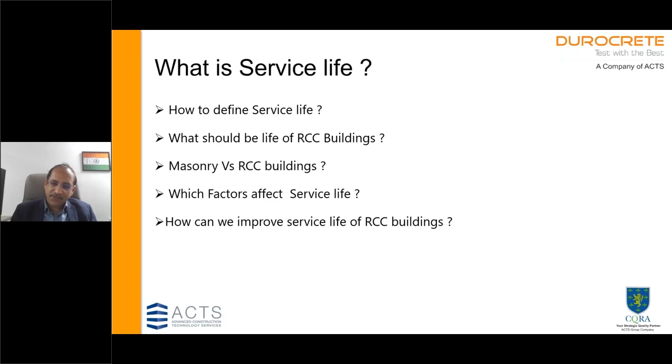So let us look at some of the most well-built structures. Now, if you go to Austria, there's Mozart's birthplace. This is a building that was constructed in 1750, and it looks so new even today. Then, if you look at Holland, it's a country where they're short of land and they have acquired space from the sea by constructing dikes. These dikes are structures designed for a life of 300 years. You can see how well they have been constructed, with due consideration to conditions of exposure.

Coming back to India, we have this BAPS Swaminarayan temple, which we were party to constructing in Pune. This building was constructed with a design life of 1,000 years, and it has got no reinforcement in the entire structure.

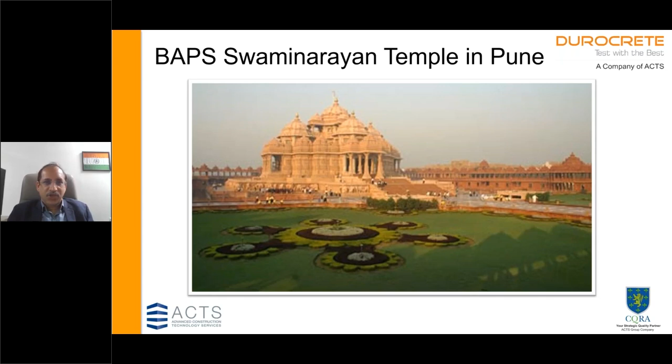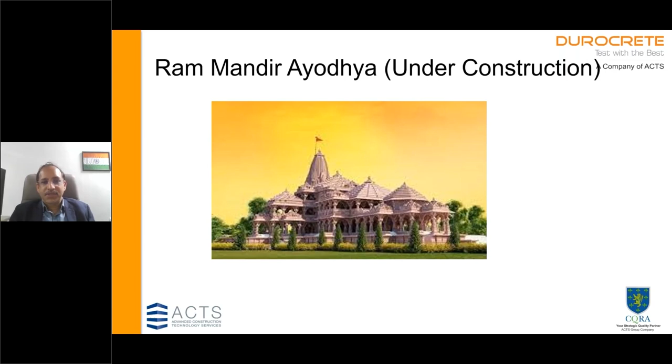We have another famous example, which is Ram Mandir in Ayodhya, which is also being built for a service life of 1,000 years, and that also has been constructed without any use of steel. The biggest challenge that they had was to make it earthquake resistant, and they have managed that.

So this question comes to us: why do modern RCC buildings have a shorter life? Many buildings constructed even 70, 80 years back, if you go to Mumbai on sea face, you will find them in good condition. Whereas new buildings constructed much later have shown deterioration. So let us look at some of the possible answers for that.

One is the use of extremely high water cement ratios, as today workability requirements are high. We are doing tall buildings. There is heavy congestion of reinforcement. We use very high workability concrete, pumpable concrete.

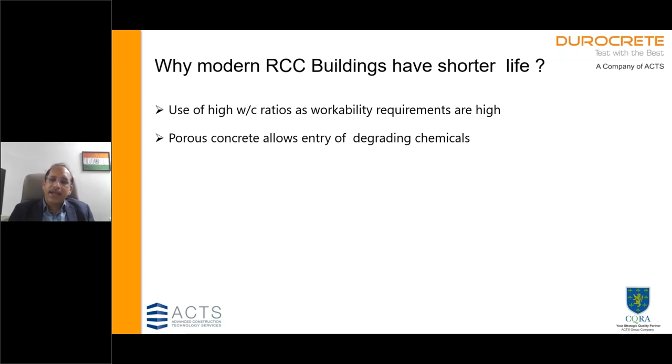And the problem is that buildings are constructed very quickly, so not enough care is given to curing. So the problem is porous concrete that allows entry of degrading chemicals inside the structure.

Then there's also a problem of mass scale RMC proliferation. The demand has increased multifold, so there is very little control on the raw materials used in construction today.

Many times the concrete is not designed for proper conditions of exposure, something we are going to study in detail in this session. And then, last but not least, quality of steel also matters. We all do physical testing, but we rarely do chemical testing of steel.

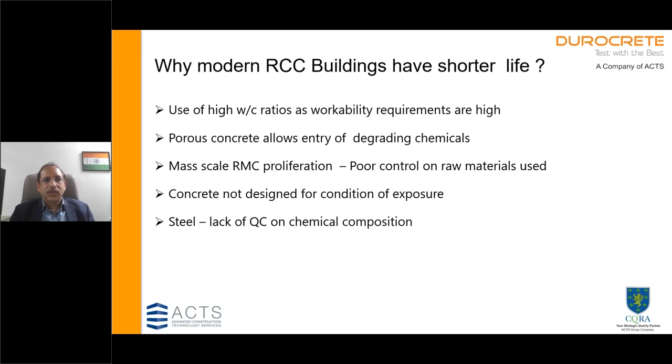So let us look at what is the failure of a structure. The failure of a structure is non-performance for which it is designed, or it poses risk to occupants, or it needs repairs to allow its intended use.

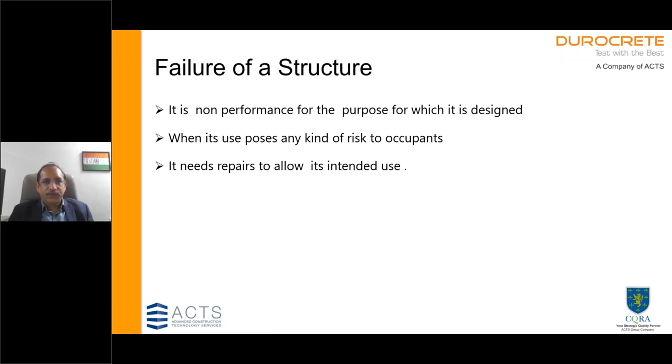So failure is not a collapse. Collapse is much more than that, it is a catastrophe. So we'll look at some examples of collapses also.

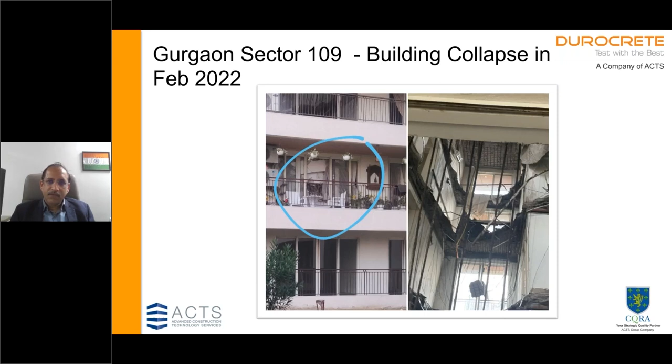This was a recent building in Gurgaon that collapsed, and there were a couple of deaths. This particular flat was unoccupied and came up for repairs. It was being renovated, and suddenly a portion of the slab collapsed, and there were some people dead in that. So one of the reasons is corrosion. We'll have a look at this in more detail in the subsequent session.

Then this famous example, it happens not only in India but in the US also. In Florida in 2021, there was this very upmarket building, Champlain Towers, which collapsed, and that left 98 people dead. Being the US, there was a lot of investigation, and last year a judgment was passed. The total settlement came out to $1 billion. Imagine such a thing happening in India.

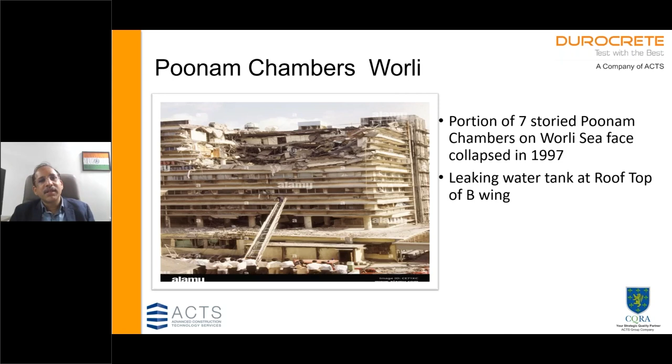So if we look at these reasons for failure, one of the primary reasons we come across is corrosion of steel. Of course, many times we find there's a structural deficiency, what we call under design. And typically in under design, the structure doesn't give problems immediately. It will show micro cracking, deflections, and then deteriorate due to corrosion and other factors.

Of course, there are factors like incorrect placement of reinforcement. Differential settlement has been found as a reason for failure of many buildings, leading to major cracks, loads exceeding design loads, and poor quality concrete. Amongst these, poor quality concrete is something we all need to focus on because it is omnipresent. The other factors, like incorrect placement of reinforcement and design deficiency, happen sometimes, but poor quality concrete is a problem that all of us need to focus on, and we will look at it in more detail.

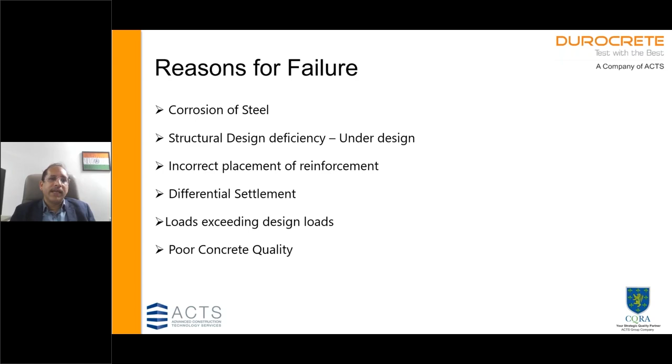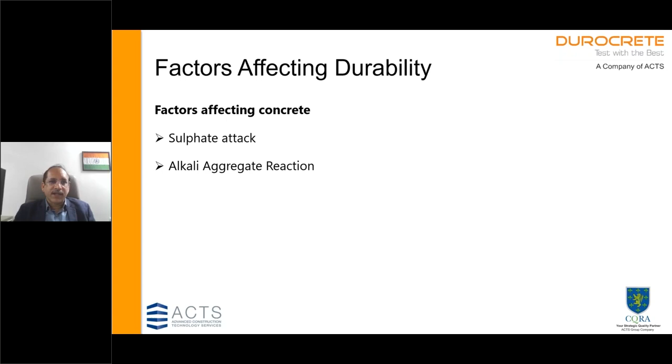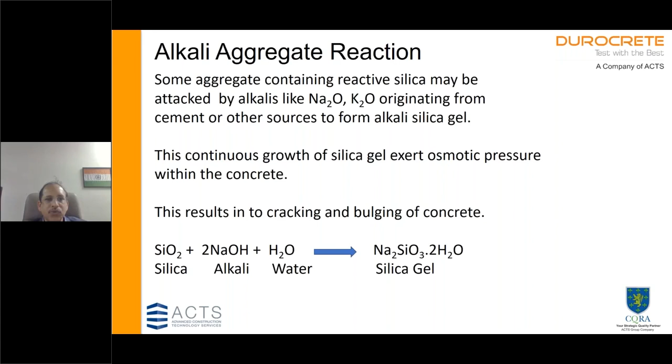So when we look at what factors affect concrete's durability, there are factors that affect concrete which are primarily sulfate attack and alkali aggregate reaction. Alkali aggregate reaction is purely an internal mechanism when there are certain reactive silicas that may be present in aggregates used in concrete, and there's a chemical reaction between that reactive silica present in aggregates and alkalis present in the concrete due to cement or sometimes water.

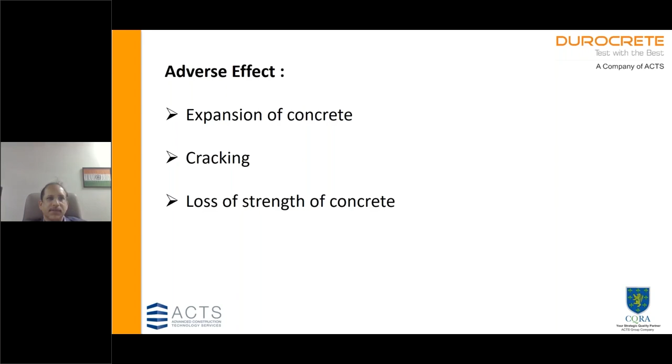So what is the prevention? Prevention is use of non-reactive aggregates, use of low alkali cements. Generally, we limit the cement content to a maximum of 400 kgs because more the cement, more are the alkalis. It is highly recommended to use pozzolana like flyash, slag, and other substitutes as a replacement of cement.

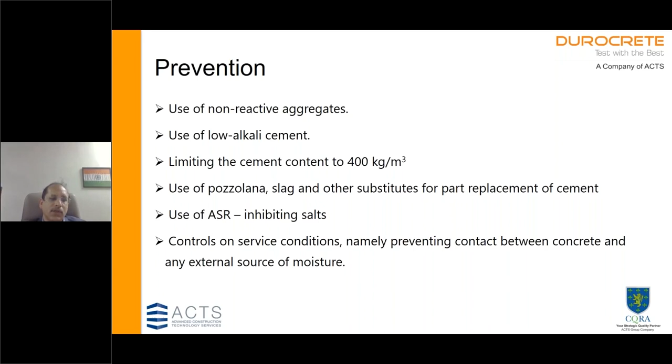Sometimes there are alkali silica reaction inhibiting salts that can be added. Another way is that since the reaction requires moisture, you can control this by protecting the surface concrete with various films and membranes that are available.

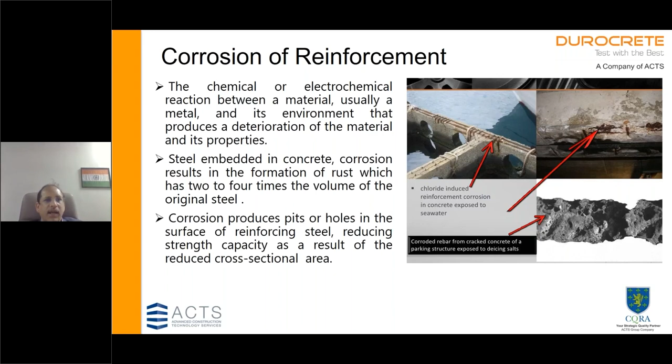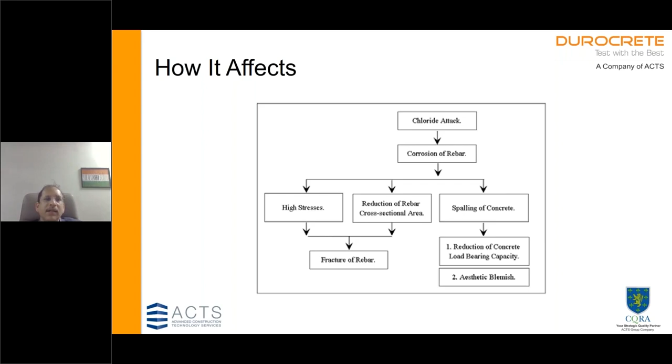Now let us look at the factors affecting the reinforcement. Corrosion of steel we are all aware of. There is a reaction between moisture and air that goes through the capillaries, touches the steel, and the chlorides can get in. Chlorides result in an electrochemical reaction, and there's formation of ferric and ferrous chlorides, and it's a very expansive kind of reaction that will split open the concrete. In this diagram, you can see the corrosion of bar, high stresses, fracture of rebar, spalling of concrete. Corrosion is the most common reaction that affects concrete RCC buildings.

So there is an electrochemical cell formed inside, and this is accentuated by carbonation, because carbonation reduces the pH of concrete. Normally the pH of concrete is more than 12, but because of carbonation, it can come down to almost neutral, maybe 8 or 9, and that is when the passivity film formed outside the rebars is lost, and you have the starting of corrosive reactions.

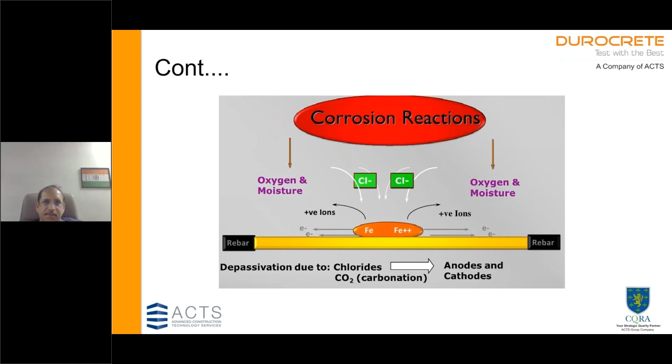So corrosion initiators are primarily carbonation, chlorides, and sometimes stray currents. You can have these chlorides during construction. The sources could be water, fine aggregates, or sometimes from the environment.

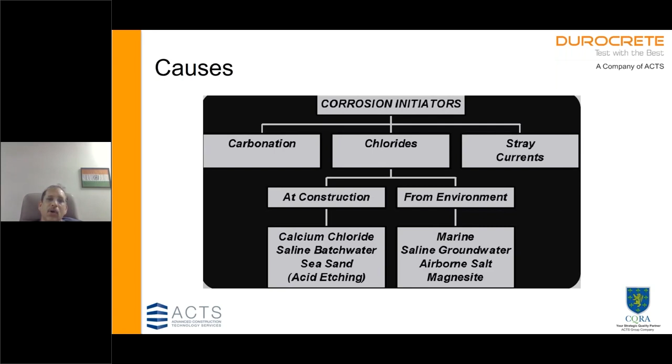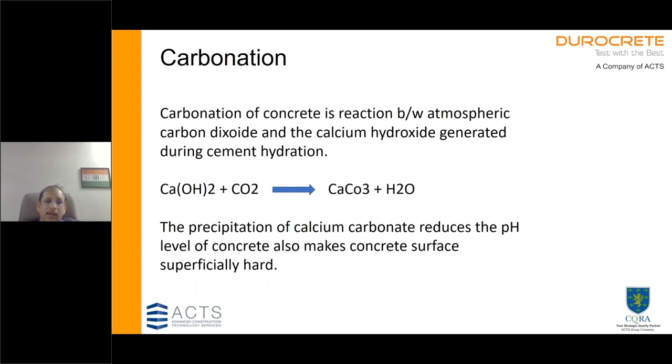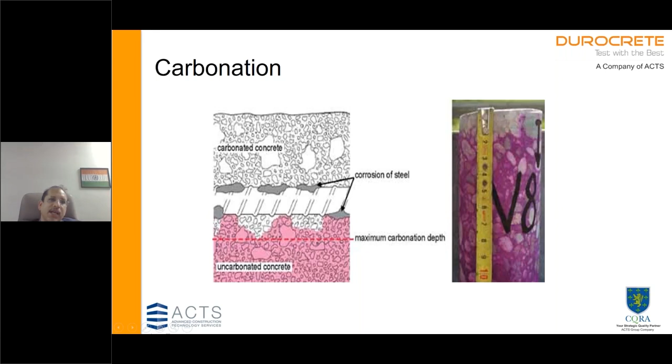Carbonation is a reaction where carbon dioxide gets inside and starts reacting with calcium hydroxide, or lime, that is present as a byproduct in concrete, and it results in formation of calcium carbonate, which is acidic and which brings down the pH of concrete. We normally test carbonation by using phenolphthalein. Wherever there's no color change, that is carbonated concrete, where there is a loss of pH, and this will lead to corrosion.

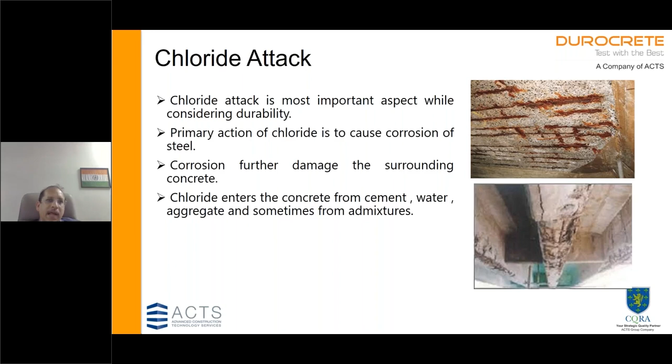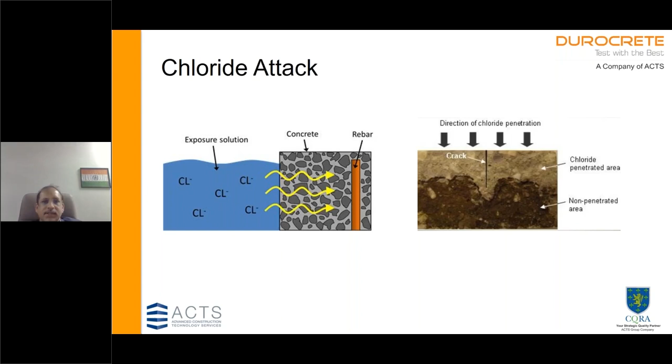We have seen chloride attack, how dangerous it can be. It is also a prime initiator of corrosion. So there is a chloride ingress, and once that happens, we find there is an electrochemical reaction, as we discussed, and it is continuous. The reaction doesn't stop once it starts.

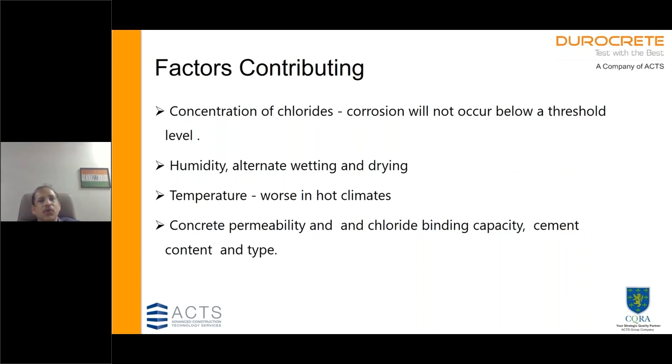So factors that are contributing are concentration of chlorides, humidity, alternate wetting and drying. Higher temperatures lead to a faster reaction, and of course concrete permeability is very crucial. Use of fly ash and GGBS build the concrete's binding capacity, so they can also help in preventing corrosion.

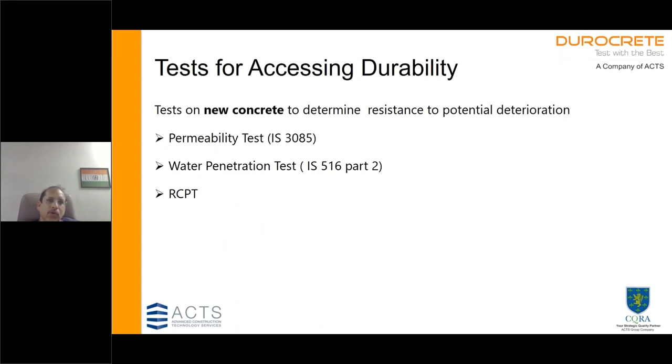Let us have a quick look at the tests for assessing durability. The standard test is the permeability test. This is a traditional test where the concrete specimen is put under pressure of 10 bar, and we wait till there is a continuous trickle of water, a constant discharge. We use Darcy's law, K equals Q upon area into the length of the specimen, to find the coefficient of permeability.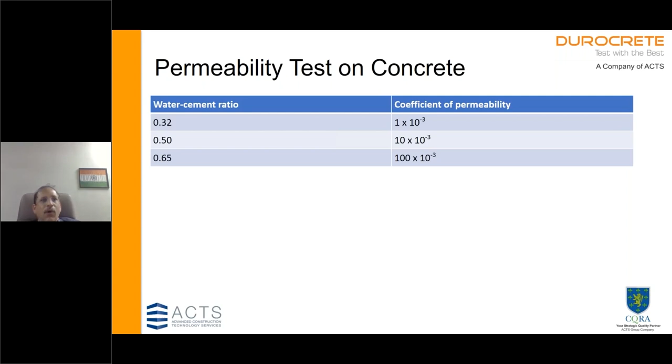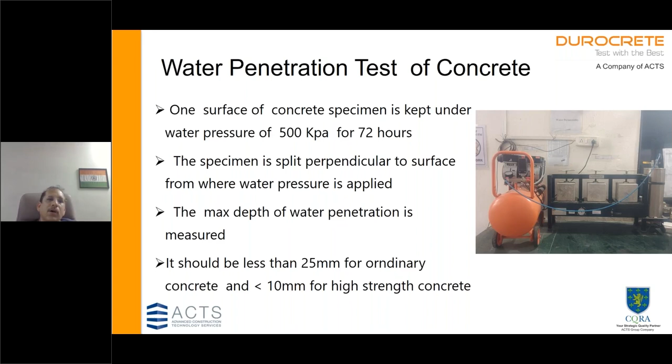Fortunately, IS 516 has given an easier test that can be done regularly as a quality control practice: the water penetration test of concrete. Here the concrete specimen is kept under water pressure of 500 kPa for 72 hours, and then it is split wide open, and we measure the depth of penetration of water. The standard says it should be less than 25 mm, but generally for high grade concrete it is recommended to be less than 10 mm. If you have very good concrete, you will generally have 3 to 4 mm penetration.

Another test that is recommended while doing concrete is the rapid chloride penetration test. It measures the concrete's ability to resist chloride ion penetration.

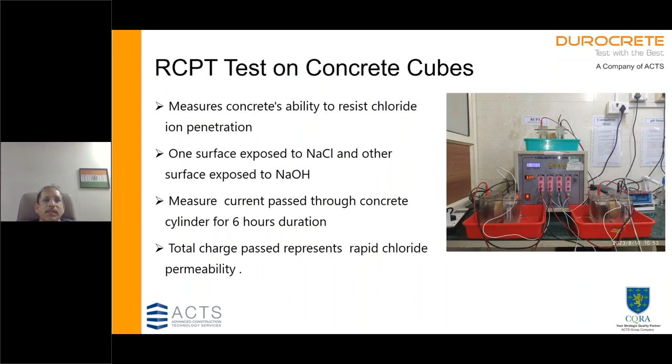We have seen how chloride ions are very dangerous - they lead to corrosion. So a quick method was developed where you pass current. There's a NaCl solution at one end, and you allow the chloride ions to penetrate while we measure the current passed over a 6 hour duration. The more charge that is passed through the concrete, the more chloride penetration there is inside it.

There are standards which say that if the charge is more than 4,000 coulombs, the chloride permeability is considered very high. When it is 2,000 to 4,000 it is moderate, and 1,000 to 2,000 is considered low.

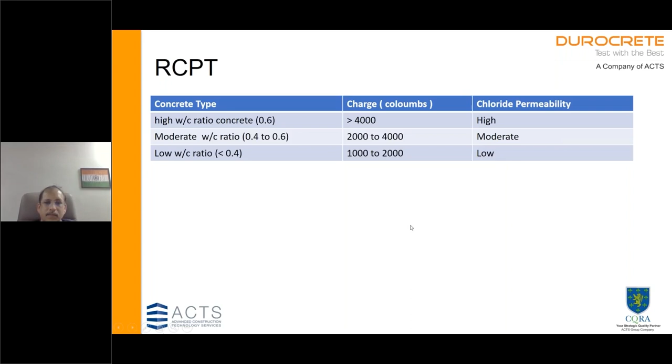So we have seen that while doing concrete work, it is important to test the permeability of concrete and do RCPT tests, and design the concrete properly so that we are able to resist sulfate attack, chloride attack, and take preventive measures against alkali aggregate reaction.

But when it comes to constructed buildings, it is very important to do periodic inspection, because many times these collapses, like the examples I showed, are completely preventable. What it needs is a timely conditional assessment of buildings.

Many times buildings are not inspected, or there is a lot of cladding inside the building. Sometimes the flats are sealed, they are not available for inspection, and heavy deterioration goes unnoticed.

So when we talk about conditional assessment of actual buildings, we generally adopt these measures: visual inspection, half cell potential test, chloride profiling, and UPV test to determine internal cracking.

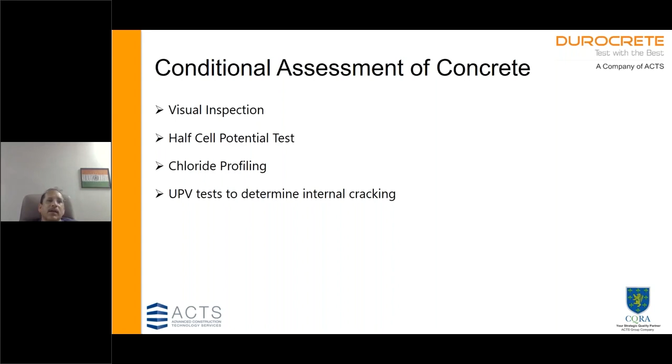The visual inspection test is the most important test, and if you do a regular visual inspection, the majority of failures or collapses can be prevented.

So what is distress mapping? How do you do the visual inspection? Basically, we check for cracks, signs of plaster or cover coming out, and progressive increase in width of cracks. You have to track and monitor whether the length of the cracks is increasing over weeks or months.

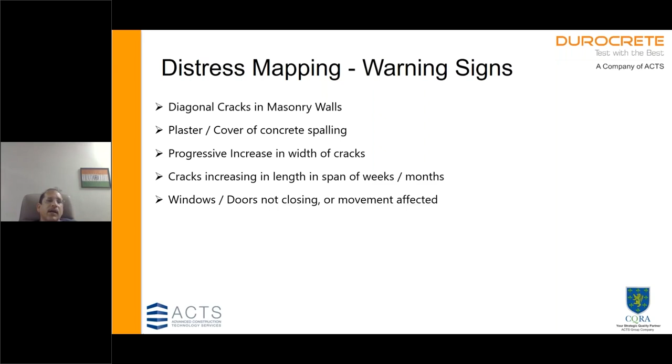Sometimes, when the structure is really under distress, especially due to settlements, you will have problems of windows and doors not closing, movement is affected, there will be deflections in the levels of cantilevers, and if there is an identical pattern of cracks on different floors, again it is an indication of serious distress.

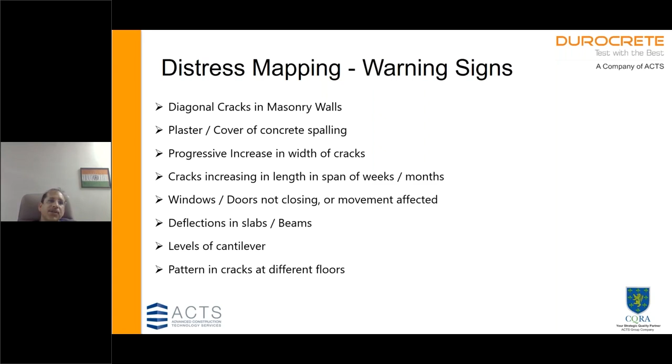So what are the high risk elements? The high risk elements are always the flat slabs, because they can fail in shear. The cantilever slabs, because the reinforcement is on top.

There are many failures that have been noticed because you can't see it from the undersurface, and many times the top is covered with a heavy layer of mortar and flooring, so it goes unnoticed. Then there are slabs with false ceilings and claddings.

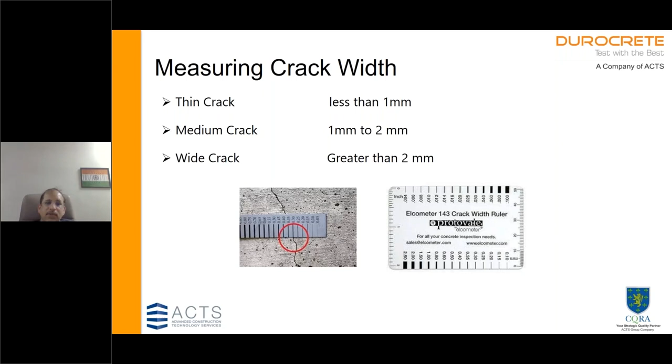So when we do a visual inspection, it is very important to identify or differentiate between structural and non-structural cracks. So when we look at cracks, it is important to measure the crack width. These are some of the standard measures of checking crack width.

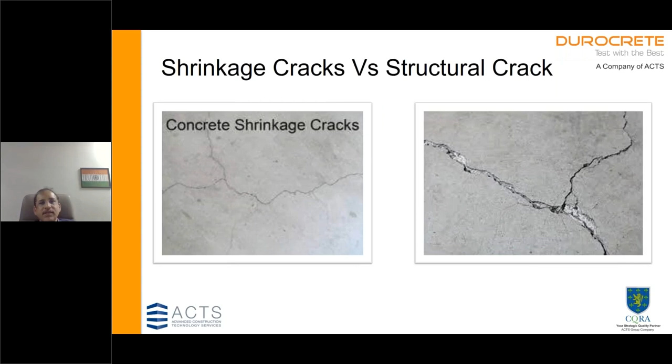A scale is available, so this is a typical difference between a shrinkage crack and a structural crack - you can see the difference in the crack width. So you can see these structural cracks in slabs.

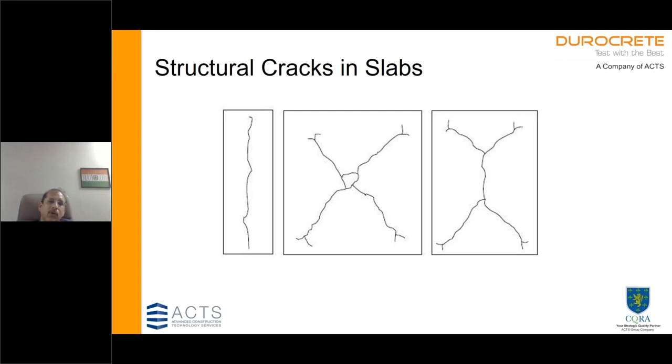So we discussed that visual inspection is the first and foremost thing that we must do as part of conditional assessment. And then there are certain tests that we do on that concrete.

One of the most commonly used tests is the half cell potential test. This test measures whether corrosion has initiated inside the concrete. One important thing is that where there are visible signs of corrosion, where you have corrosion cracks along the line of reinforcement, this test does not add value. So this test is used where there is no visible corrosion, but the process has started inside, and you could possibly take certain corrective measures in due course of time.

These days there are a lot of paints available that can stop the ingress of water and moisture. So you can basically delay the process of corrosion if it is detected early.

So here it measures the potential difference created due to anode and cathode, and the electrode - one is the reinforcement, and the other half cell is the solution, a copper sulfate solution.

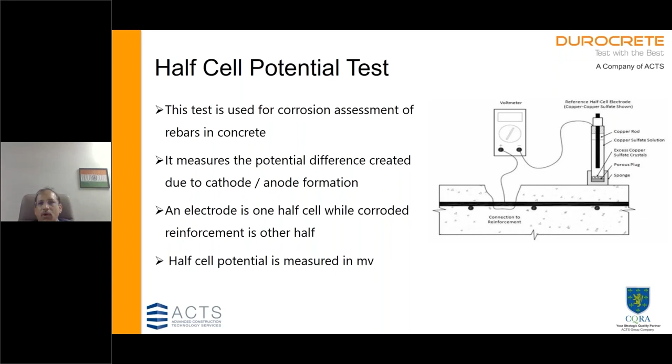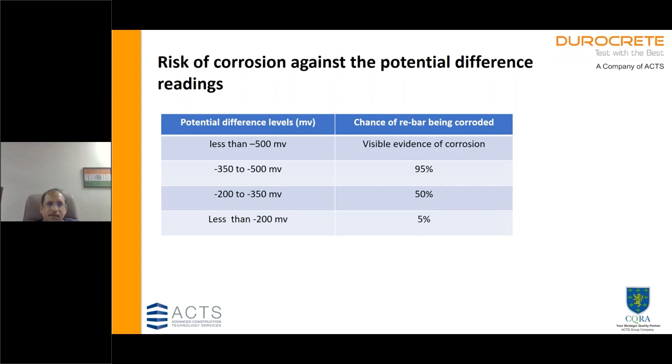So you can use half cell to do contour lines. When you have a structure that is distressed, you can identify areas that are not showing visible distress, but possibly corrosion has started inside. It is advisable that when you do this testing, you should calibrate it by exposing certain areas. Certain rebars need to be exposed, and you need to calibrate it with the potential difference and the actual condition of the bar, how much corrosion has happened.

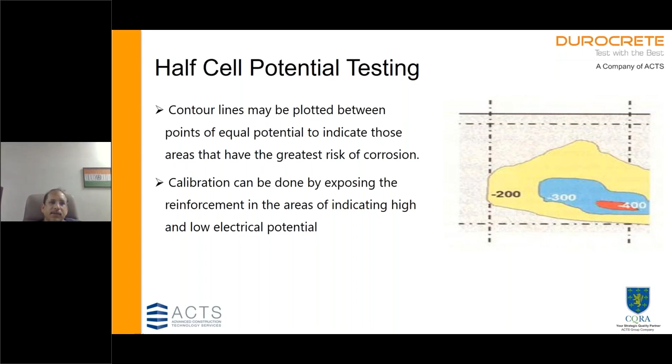So generally, how do you make use of half cell potential to take decisions? If the half cell potential is between 350 to 500 millivolts, you need to do frequent conditional assessment of the building, so the next inspection due will be very frequent, maybe 3 years. If it is between 200 to 350 millivolts, you may do it after 5 years. And if the potential difference is less than 200 millivolts, you can take a longer term for the next inspection.

You can also apply waterproof membranes to concrete by blocking entry of moisture, and extend the life of the buildings. And you can use it to identify areas where steel needs to be exposed for retrofitting.

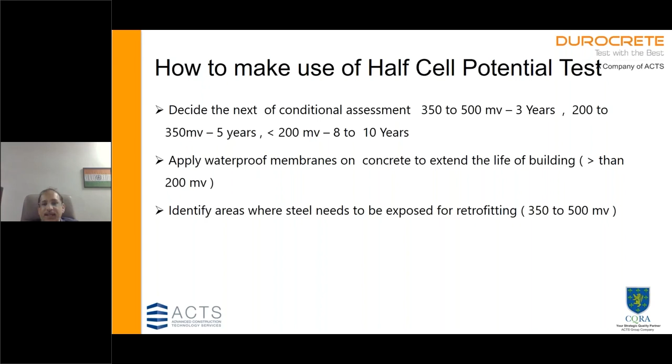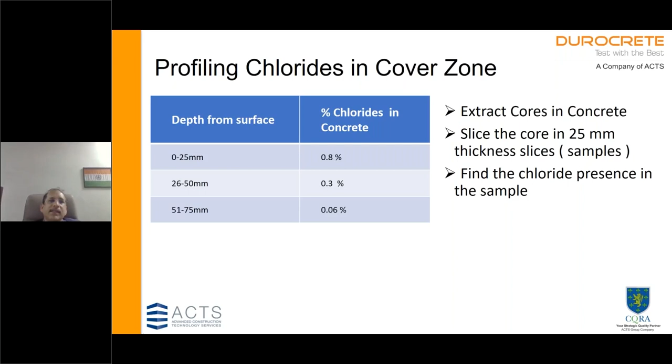Another common thing that is done for buildings that are already constructed is profiling chlorides in the cover zone. So if the depth from the surface is 0 to 25mm, what you do is extract cores and slice those cores in 25mm thickness, and check the percentage of chlorides in each of those slices. You will know what is the extent of ingress of chlorides inside the concrete, whether it has reached the cover zone, and then you can take protective measures.

Another test that we do is UPV of old concrete. Generally UPV tests, there's a code 516 that divides the concrete into different types of integrities. But a UPV reading of less than 2.5 certainly indicates that there is internal deterioration of concrete and a high level of cracks. A UPV reading of 2.5 to 3 kilometers will certainly indicate micro cracking has already started inside.

So you have to look for areas where there is very low pulse velocity, because once the internal cracking has happened, the pulse will scatter and you will not get a reasonable reading. Sometimes you will not get a reading at all. So these are signs of danger, and you need to do detailed investigation.

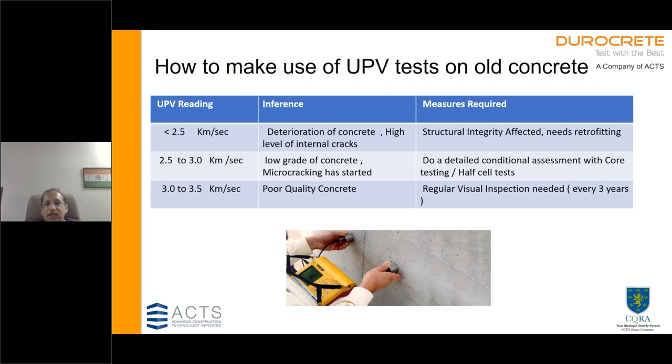Now, IS 456 has defined 5 conditions of exposure: mild, moderate, severe, very severe, extreme. These are based on what kind of weathering the concrete is subjected to. So many times the condition of exposure will be different for a substructure versus a superstructure. And you cannot say that just because we are in Pune, Bangalore or Delhi, and not on a sea coast, we would be mild or moderate.

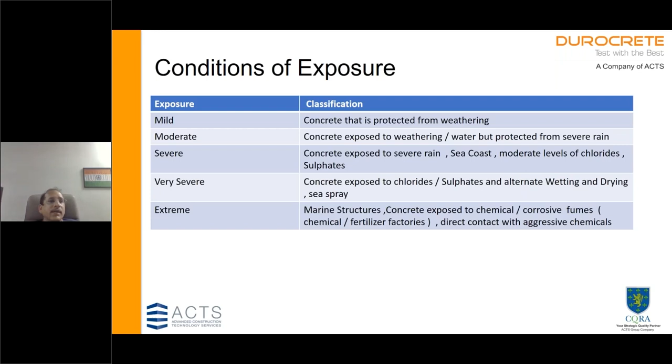If you have a continuous water table coming up, even in a city like Pune, you could have a severe or very severe exposure. If there is alternate wetting or drying, or if there is a presence of chlorides and sulfates in the soil, then the concrete has to be designed accordingly. So these are some of the durability considerations given in the IS code. One of the minimum requirements for extending the life of a building is minimum cover, and this minimum cover is often overlooked.

Actually in practice, it is there in the design, but it is not actually followed in practice. Greater the cover, greater is the protection given to the reinforcement, and greater is the life of the building.

What we find is that many times the condition of exposure is not properly defined in the DBR. So even if you are in a city like Pune or Bangalore, a non-coastal area, you could have a severe condition of exposure where your concrete is exposed to heavy rains. If you are in Lonavala, where rains are very heavy, you may have to design it for a severe condition of exposure.

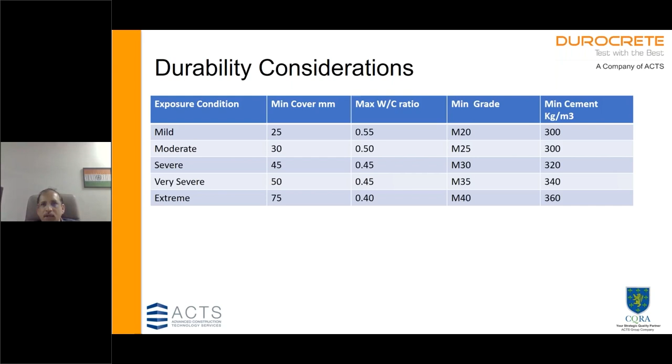For each condition of exposure there is a maximum water cement ratio, minimum grade, and minimum cement content. These criteria are related to permeability of concrete. Lower the water cement ratio, lower is the permeability. And we need a certain minimum cement paste volume to create that imperviousness, so minimum cement content is also defined.

Now this is table 4, which is very often overlooked. It is given in IS 456. So when you do a soil investigation report, you generally test for every meter. Apart from the index properties, you are also checking for sulfates and chlorides.

The code has already defined the minimum cement content and maximum water cement ratio for different classes of attack, and they have defined these classes of attack. Many times we find that there is a geotechnical investigation report, but the class of attack and the grade of concrete and the maximum water cement ratio is not taken in conjunction with the soil investigation report.

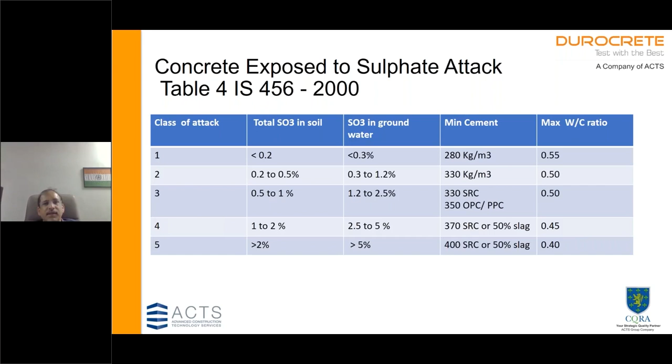If the SO3 content is between 0.5 to 1, they recommend either sulfate resisting cement, OPC, or PPC. Generally, if you are having a very high class 4 or class 5 level of sulfate attack, you need to either use sulfate resisting cement, or if there's a possibility of chloride attack, you should replace at least 50% of cement by slag and not use SRC. So these are the things we need to look at. Importance of geotechnical investigation is very important.

So how to improve service life of concrete? One is maintain proper clear cover, use low water cement ratios, and good curing. It has been found that good curing reduces the permeability of concrete.

In earlier days they used to give a lot of importance to curing. Today, because of the speed of construction, we cannot give so much time. But 7 days of intense curing is also considered quite good, but it has to be intense and not intermittent curing.

We strongly recommend use of fly ash and GGBS for enhancing durability of concrete. Then, whenever you have underground concrete substructure, water-resistant coating should be given. It is always beneficial. In earlier days, they used to either have Shahabad stone protection or sometimes bituminous coats were provided. These days, many membrane coatings are available, and they should be used.

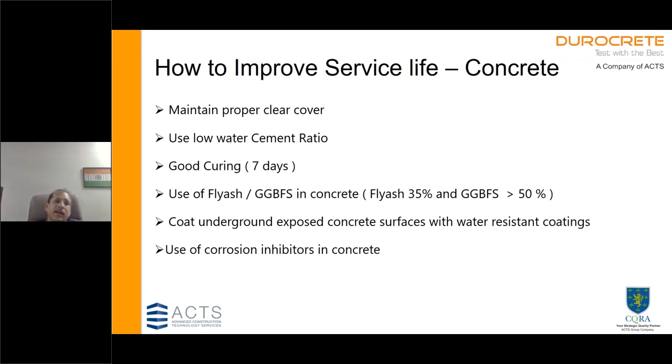And today there are also corrosion inhibitors available in concrete. Now this is very important: testing of hardened concrete. We all test concrete for compressive strength, but it is very important to test concrete for acid soluble chlorides. The maximum limit is already specified in IS 456, which is 0.6 kg per meter cube. And for pre-stressed concrete, it should be 0.4 kg per meter cube.

Now, many times we are taking concrete from RMC, and RMC generally gives certain certificates. How will a client verify the kind of quality control that goes into the raw materials for the concrete being supplied? That is very difficult for a client. But the easiest thing to do is, when testing concrete cubes, send one of the cubes to a lab and check it for acid soluble chlorides and sulfates both.

And this test is very easily possible. It is not very expensive. So actually, ideally, you can do it for every pour.

One very interesting thing that happened regarding that Delhi collapse I showed is that there are many buildings constructed 8 to 10 years back that have shown a lot of distress. And one of the reasons is the water that was used inside. It was found that treated water was used in Delhi because of shortage of water, and the local authorities allowed treated water to be used.

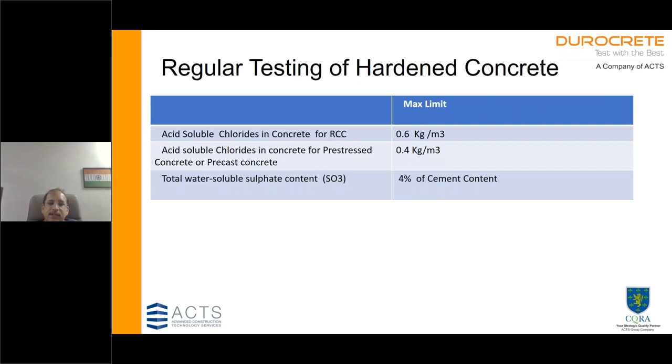Then, of course, we cannot forget testing of rebars. We all are aware of the bend test, but the rebend test measures the effect of strain aging or strain hardening. It's in effect a kind of durability test. Generally this test comprises bending a bar to 135 degrees, putting it in boiling water for 30 minutes, then again bending it further to 157 degrees and checking whether there is cracking. Basically, it is a strain aging test.

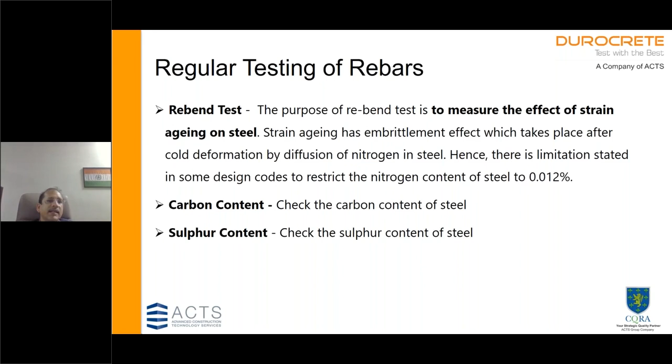Then we should also check the steel for carbon and sulfur content. Higher carbon content and sulfur content can lead to corrosion.

So how do you improve the service life of buildings by taking care of the reinforcement being used? Of course, using good quality steel. There are special steels available, like corrosion resistant reinforcement steels that have a high amount of chromium, which prevents corrosion. Then there are epoxy coated bars also available, but care has to be taken that no part of the epoxy is damaged, because if a certain portion of the epoxy coating is damaged, that can be very dangerous, as it can lead to pitting kind of corrosion.

These are for special structures. You can go for hot dip galvanization or cathodic protection of steel. Hot dip galvanization was used for the Baha'i temple.

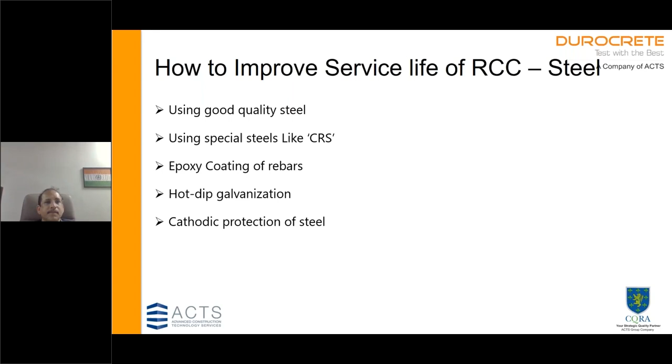So there are some questions you need to ask yourself. First, is your concrete designed for the relevant condition of exposure? And how is that relevant condition of exposure arrived at? Is it based on the geotechnical report? Because many times we find that the geotechnical report is on one side and the actual condition of exposure considered is not in tune with the geotechnical report.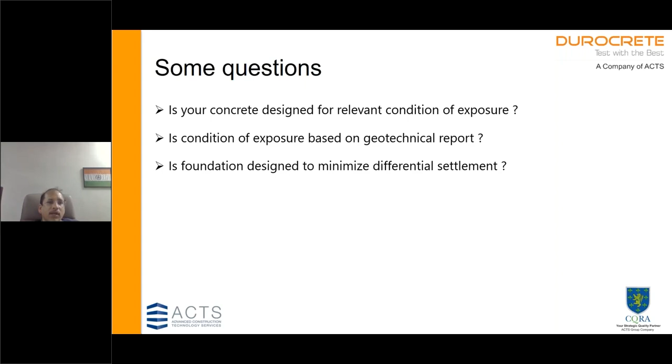Is the foundation designed to minimize differential settlement? Some portion of the strata is hard and some portion is on softer strata. This is a very common problem causing long-term differential settlements and cracking.

Do you ask for RCPT and water penetration tests when you do a mix design or when you change the source of concrete? These should be done as mandatory practice. Do you check chlorides and sulfates in concrete cubes on a regular basis?

So these are certain measures that you could do while doing the concrete. And of course, early detection of problems by way of visual assessment and other tests like half cell test and chloride profiling can lead to early measures, which can save a lot of cost and extend the lifespan of already constructed buildings.